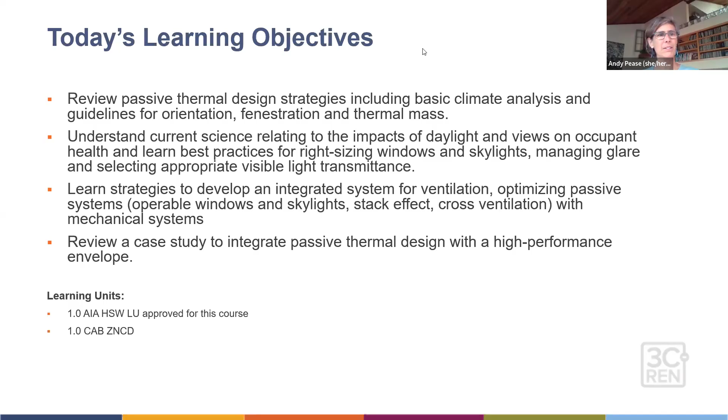All right, our agenda. Looking forward to having this conversation and whatever participation you all are going to provide. So we're going to talk about the historic context of passive solar design and how we got to where we are in terms of thinking about passive solar, going through some of those foundational principles that we've grown up on, been learning in school. And then we'll turn it over to Jennifer to talk about what's changed. Why are we having a different conversation? Why do we need this next generation discussion, and what works now? Then a little touch at the end about what's next in terms of emerging opportunities.

So first, I want to just give that little bit of overview, why this class. It starts more than 20 years ago with a group of folks getting together to make a nonprofit called SLO Green Build. Chime in the chat if you were a part of that or remember that organization. It was a precursor to what has now evolved into the Central Coast Green Building Council. And in those early classes, we were just teaching what is green building.

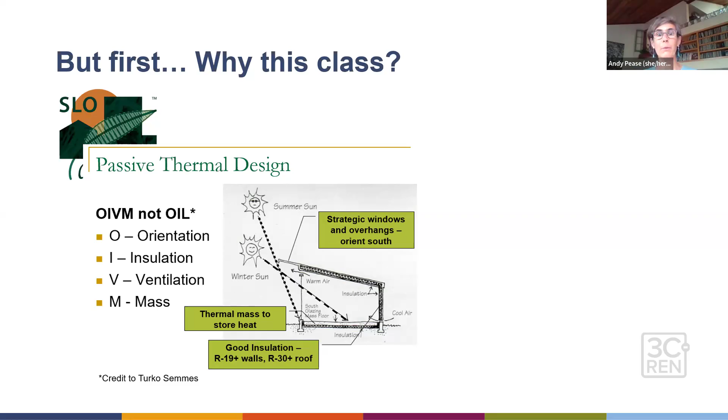And so one of our trademark pieces of information to share was about passive thermal design. Working with Turko Semmes, he had coined this phrase of orientation, insulation, ventilation, and mass. And he would say OIVM, not oil, which was terrific. And then we added a D for daylight at some point, so we had DOIVM. We continued on in this progression. Then there was a period of not a lot of activity specific to these kinds of trainings. And then we were able to pick up with 3C Ren, and a lot of our classes have been about the energy code, about electrification, and about heat pumps.

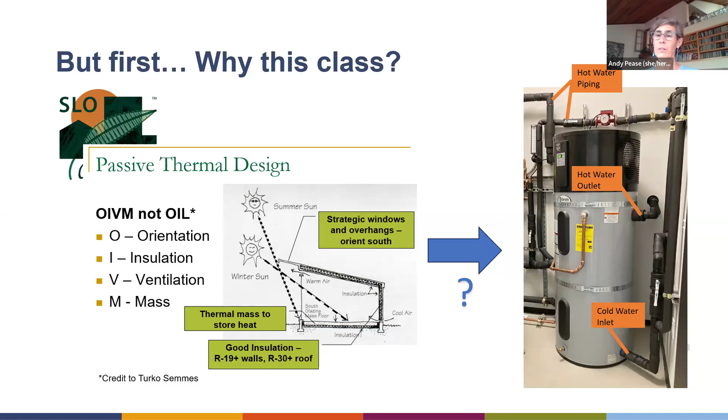And then I got an email from Turko saying, hey, love the classes, but really, what happened to passive thermal design? Like, what are we doing there? So great inspiration. What happened to passive solar? So let's dig in.

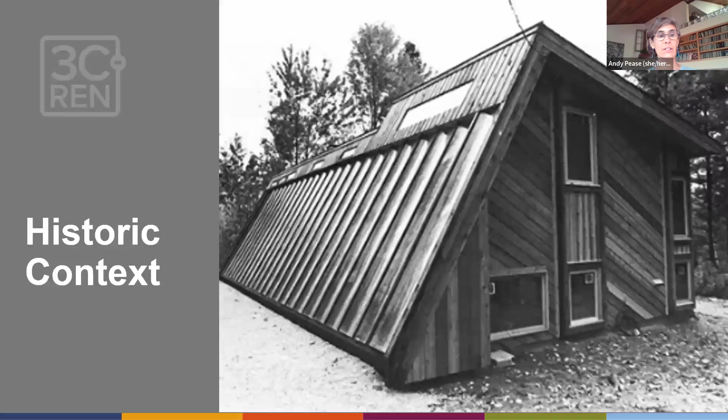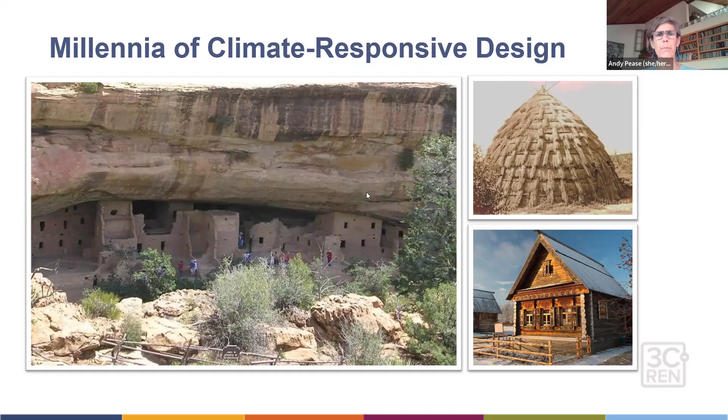There's ventilation. And then up on the right, more local to the Central Coast, using grass and reed kinds of structures. And then way up in Siberia, big trees were available, and you make the tiny little fenestration and these mass timber walls. So we've known how to do that. And then we had this 50, 80 years of maybe collective amnesia.

So 1970s. Oil embargo, and oil and gas got very expensive and very scarce. And so we started to kind of adjust some habits, behaviors, and then there were requirements. Like reducing the speed limit from 70 to 55 miles per hour. Oregon turned off all hot water to state buildings. So we had this kind of a reductive approach to the energy crisis. So it's like, we'll just use less, do less, which has its place and its role, but there were other ways to be thinking about it in addition.

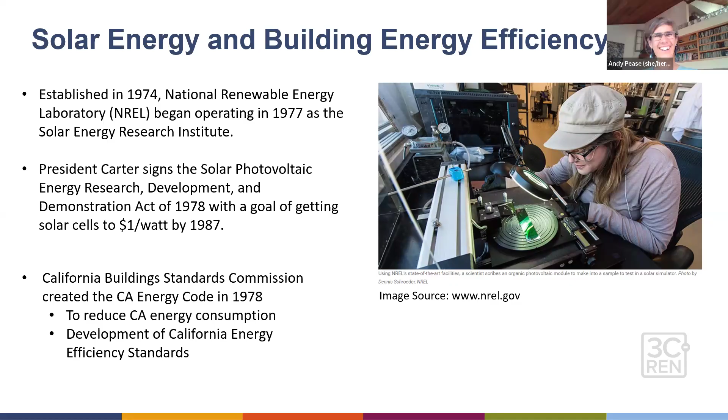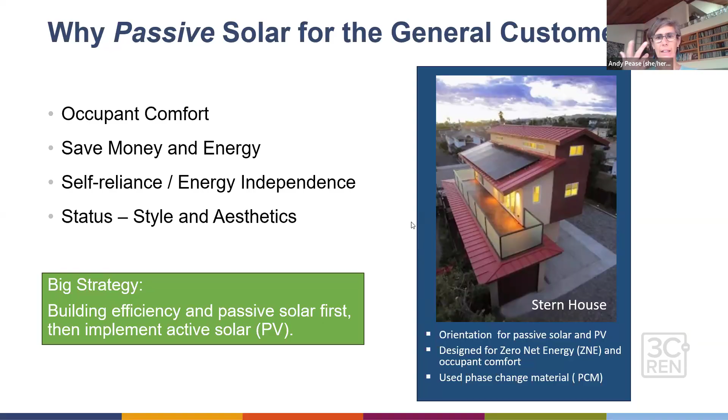I remember thinking, oh, this is important to think about. At the time, an office building had lots of people and lights and equipment and maybe incandescent or even fluorescent lighting. So there was so much heat being made within the building that it was going to need a lot of cooling load, less about the envelope. Whereas in a home, one person is not generating a lot of heat. And so you need to think more about the envelope there, right? So kind of that consideration.

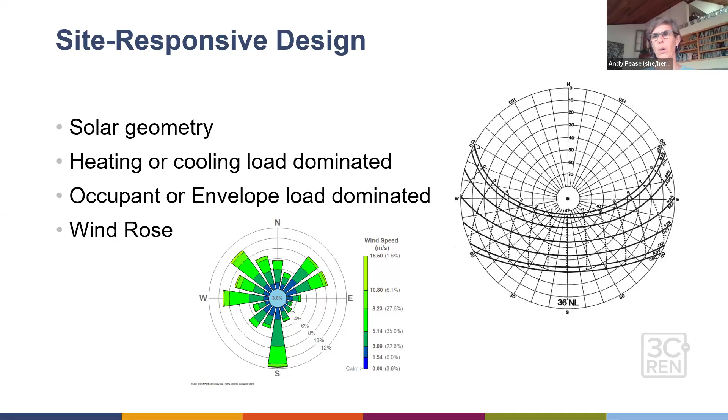Wind roses, a traditional way to show where the wind is coming, not only where and how much, but seasonally how much. So is that westerly wind cooling and helpful in the summer, or is that more of a winter storm wind that we need to think about within our design? And then we would do a lot of analysis at all these sun angles. Again, a sun path diagram, and that informed the overhangs. It informed how much thermal mass and where to put thermal mass.

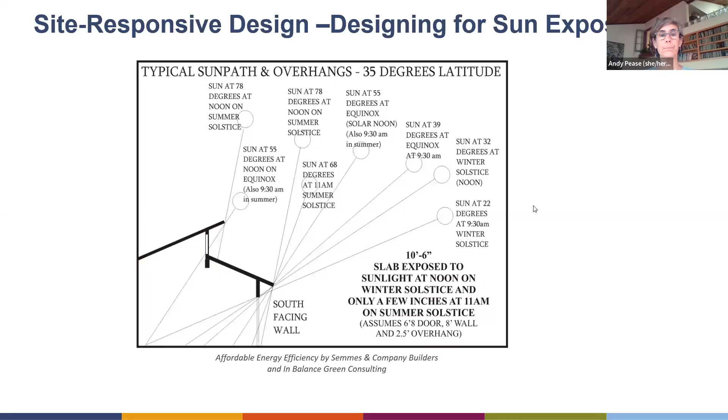And then putting it all in practice. This is San Luis Sustainability Group, Congregation Beth David. It was one of the first LEED certified buildings in our county, and I think the first LEED certified synagogue in the world. And it just epitomizes all those passive solar strategies we were just talking about in terms of overhang, window placement.

Most of the walls are straw bale, so a lot of mass. It's got that thick exterior stucco. But then the south-facing wall with a lot of windows is stick framed. And you can see there's light shelves that bounce in for daylight. Down below the windows, there's actually trombe walls, so tanks of water, and the exterior glass surface is black. And so the tanks of water heat up during the day, and then at night they're little radiators.

Super effective. In fact, sometimes they were too effective. They had to add seasonal shading because those shoulder months were getting potentially a lot of sun. So a terrific model of the passive strategies that we were going with at the time.

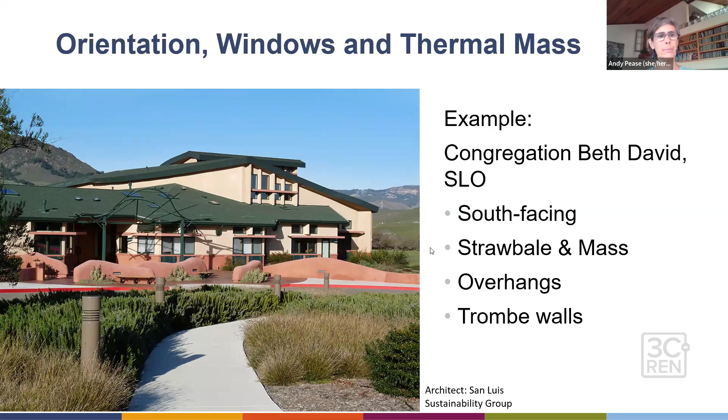Natural ventilation, again, lots of studies and experience that show us how to do this effectively. Low windows, high windows, right? Kind of a stack effect of bringing air up and through. Or another approach in this center one with a cooltower. So in this case, there's warm air up high, and then you can actually add a little bit of moisture inside the tower, and that cools the air, which then drops into the space through these openings down below. So another way to have cool air entering the building in this passive approach.

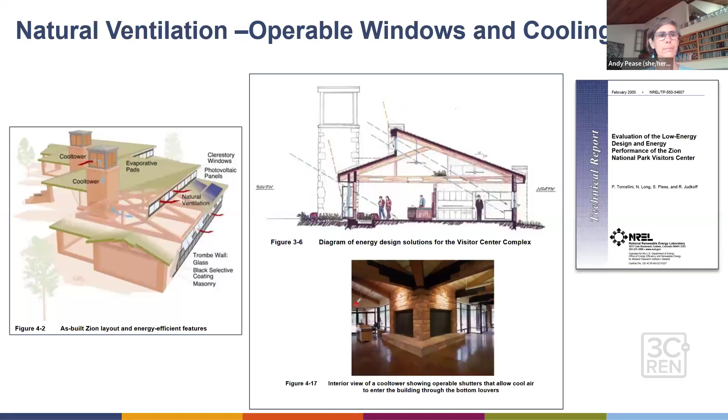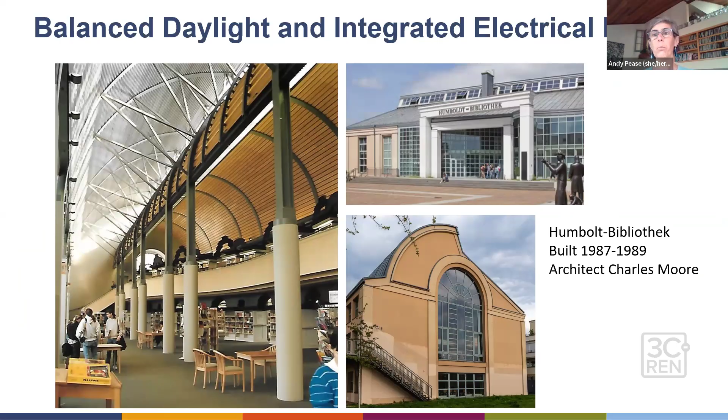And then, of course, finally, in those passive thermal design, passive solar principles is daylight, having good, balanced daylight, but then also starting that conversation about what it looks like when you integrate electric lighting, so that if you have the daylight, are the electric lights going off? Is it complementary in terms of the design and the architecture? And here we have a Charles Moore building. Beautiful.

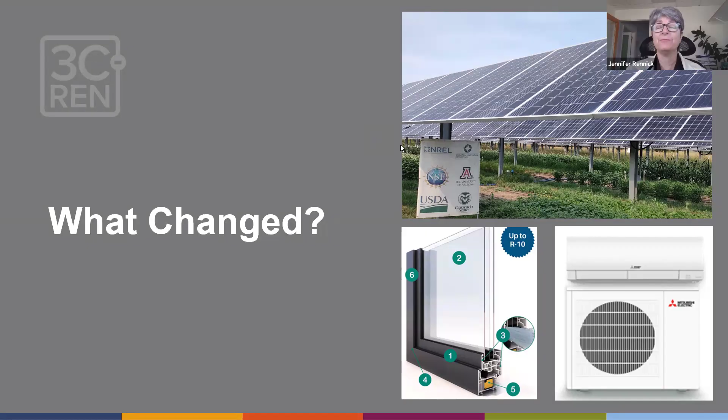Okay, and then I turn it over to Jennifer to talk about what has changed. Basically, what's changed is improved technology and computing power. And so everything that Andy said, all those principles are still true. It's still effective. You could still build that way and you'd still have a good energy reduction.

But now, over the years, we've got better climate data, better software for analyzing buildings, and our California Energy Commission has made Title 24 Part 6 a reality for all of us architects. And so we have to design a building that's basically energy efficient. And really, our current Title 24 baseline has basically caught up to everything that we used to talk about 10, 20 years ago.

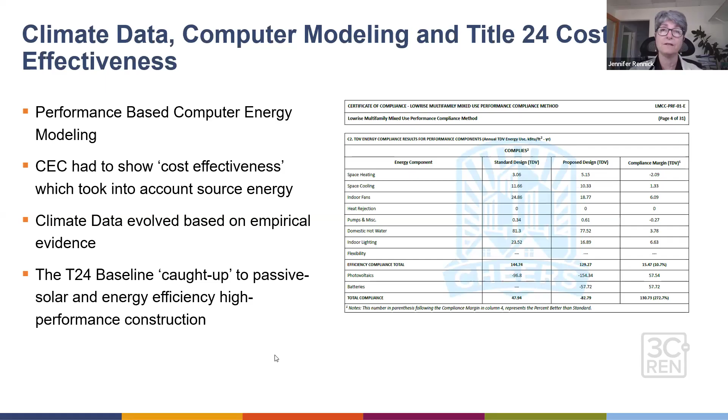And then over the years, Title 24 has caught up. And so all those passive solar principles are still true. It's just that, little by little, the energy code has shaped us and architecture education has moved in this direction. Now, when we go to design a house, and this is a house example, we're just a little bit more energy efficient than what we used to tout as all the passive solar. Great, amazing way to design.

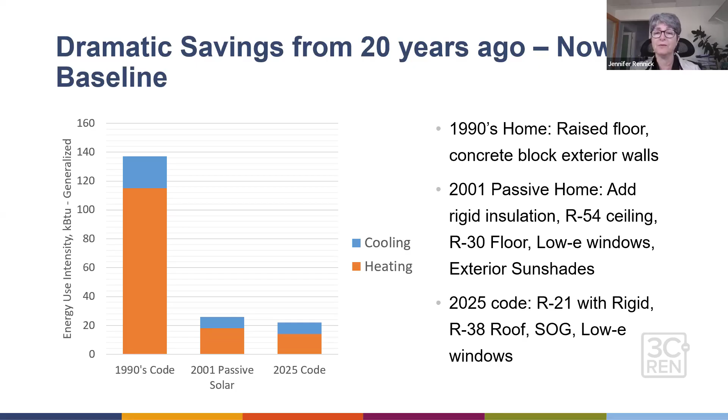So what's changed? Well, some of it is that we have better insulation, and better installation of our insulation is required. So that's baked into the code. And some of the things we do now that we didn't do is really look at air sealing, all of the air gaps, using blown-in products that really fill the whole wall cavity.

So no gaps, no voids. With straw bale, the straw bales themselves were very well insulative. So that's why that had such a powerful impact back then, because you just couldn't get well insulated wood stud walls back then. And now we go around and do things like seal around all the sill plates and cut around electrical outlets, etc. So we have better insulation products.

Yeah, keep going. You were right. Well, I didn't know if you want to touch on the HERS in terms of verification of that. Oh yeah, good point. That's the other thing. True. HERS verification was introduced into the energy code. So we do all these things that you see a picture of, but if your project has a good HERS rater on board, and your insulation contractors are really up on QII, quality insulation installation, then with the combination, you should have a house that looks a lot like these pictures. And that's improved the performance on a lot of homes, just having that in place.

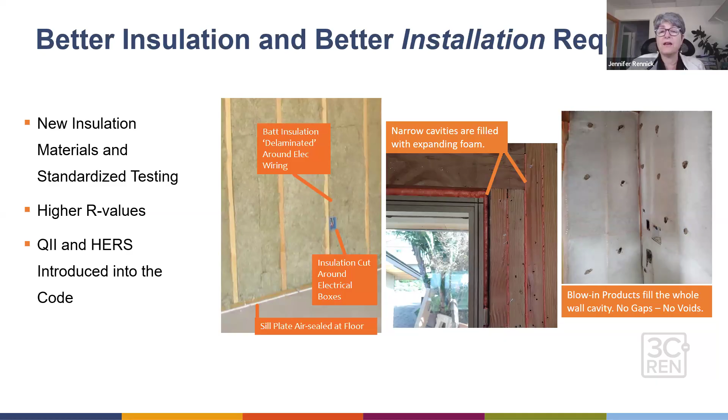When I first started out in architecture, if you had fiberglass batt insulation, you could have huge quantities of tops of the walls and each bay not being insulated, and then someone might complain about it, so they'd try and stuff something in there, and there was really poor quality. Right. And that was still better than what it was, which was no insulation. Right.

I worked on a remodel house. The homeowner was shocked when I asked him, well, what insulation do you have in your walls? And they're like, I don't know. They're 2x4. It's probably an R13, right? I don't know. You better check. And so he digs a little hole, and he ended up ripping the drywall back because he was so frustrated to find out there is no insulation in the house he had just bought. And presumably it was built during the era where the whole house was supposed to be insulated by code.

Okay, so kind of fast forward, parallel tracks. Coming out of Germany, we have passive house. So we hear a lot now in California, passive house. What's the difference? Passive house, passive solar. They both have the word passive in it. Germany is much colder, even colder than our climate zone 16 here in California. So a lot of the work in Germany and in Northern Europe is about really eliminating thermal bridging, minimizing air leaks. Yes, high quality insulation and strategically placed windows. All that's true. But thermal bridging and air leakage are probably two main things that we didn't talk about as heavily in California. But if you were in Colorado, that was something you also wanted to do.

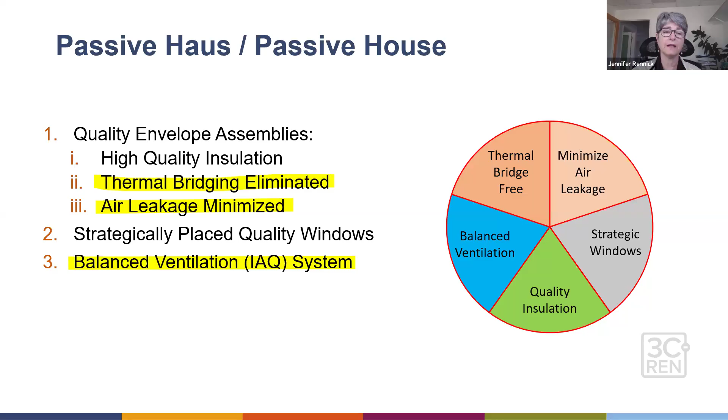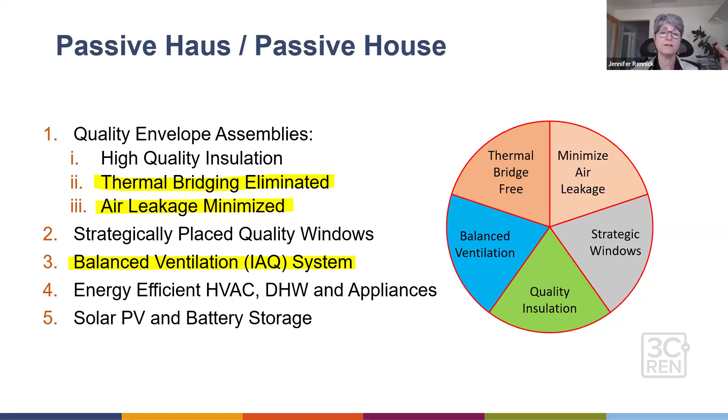And then with the houses being tighter, you need to bring in outside air on purpose, mechanically control that ventilation rather than just letting the envelope leak air. And then we layer on energy efficient heating and cooling systems, energy efficient hot water heating and appliances, plus our solar PV and battery storage. And so now as a whole package, we can design zero net energy buildings. The passive solar part, thermal mass, solar orientation, that still works in California. But now we've got all of these other things that we can work with.

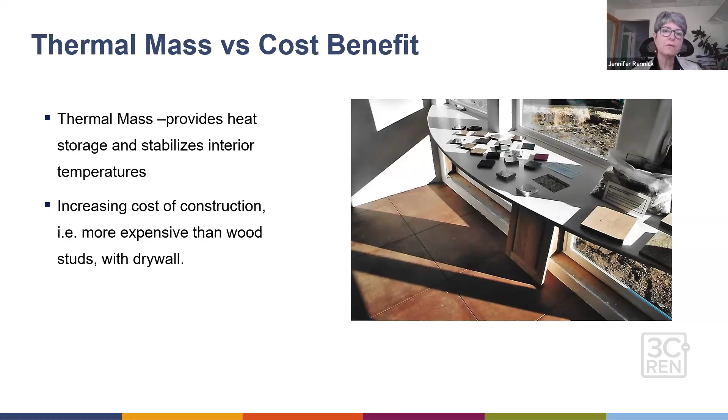So what we found, though, is that what we were doing with passive solar is a lot of thermal mass, and the thermal mass became increasingly expensive, but it provided heat storage from the sunlight coming through our typically clear glass. Sometimes it was still single pane glass. So we had a lot of excessive heat. And so to be able to store that excessive heat in the thermal mass of the building was a way to stabilize interior temperatures. And as our window technology improved and insulation improved, we didn't need quite as much thermal mass. Okay.

What we started to see, I remember in the 1990s, is straw bale and other thick wall assemblies were becoming popular. It was really nice for passive solar because the thick wall of the straw bale could provide lots of insulation. And we were still working with windows that would allow a lot of solar heat gain through the glass. And we would mass up the building, so to speak. So we might have a house that, even if they didn't do straw bale walls, had thick insulated walls, plus CMU or rammed earth inside the house, or concrete or adobe floors, or all of it.

And the conversation started to shift: hey, wait a minute, with these other technologies coming on board, better windows, better ways to insulate our wood stud walls, and not every climate zone is like Southern California, can we overmass our buildings? And is that actually giving us a building that has more carbon impact? We're reducing our operational carbon, yes, but the building itself has so much mass. Are we having too much carbon in the initial construction?

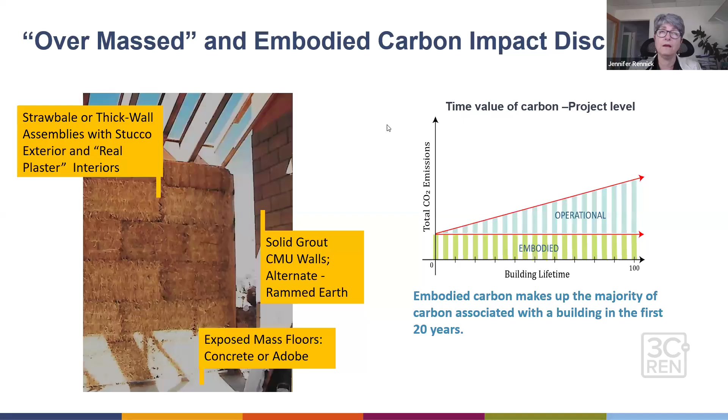So that combined with other improved technologies like greater lighting efficacy. So some of this too was that when we had incandescent, even compact fluorescent lights, like Andy talked about with the daylighting, there was a lot of heat given off by those lights, more than the heat from the daylight itself. Now with LED lighting, the solar heat gain gives off more heat than the LED lights. So we saw kind of a trend to not having so much glass.

And then we have high performance windows now with the selective low-E coating. So we can have glazing that lets very little solar heat in, or we can fine tune it and allow relatively a lot of solar heat to come through. Air sealing, better insulation, better HVAC, better way of heating, and that continued conversation of thermal mass benefit versus the embodied carbon impacts. Now, with our higher efficiency heating and cooling systems, we now have heat pumps.

And the heat pumps, yes, they use electricity to create the heating and cooling, but 1 unit of electricity into these systems, you could get 3, 4, sometimes higher, more energy output. So they're definitely more efficient than burning fossil fuel right at the building. And so part of the way we used to do it is use a lot of appliances that use fossil fuel directly. And we'll hit on that again in a moment.

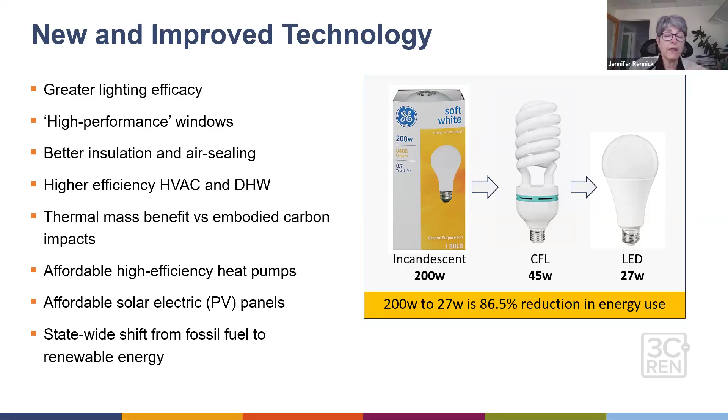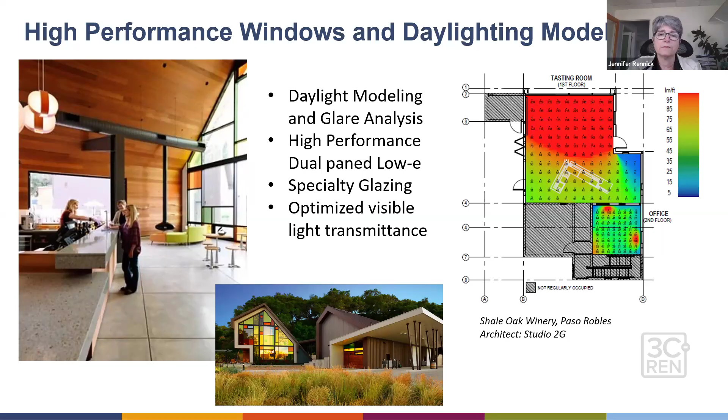And then with our daylighting, we can look at the glazing and fine tune it. So this project, for example, Studio 2G, we worked with Newcastle Glass to really get them the aesthetic colored glass look, plus fine tune the visible light transmittance and the quantity of solar heat gain through the window. That wasn't so popular or possible, you know, 20 years ago.

So in California, to kind of put this in perspective, in the 90s, when we were still doing a lot of work with passive solar, our electric grid was not very clean. California was still burning coal back then to generate electricity. We were burning natural gas to generate electricity. So the electric grid itself was quote unquote dirty, as opposed to now becoming more clean with renewables.

So we didn't push electric appliances very much because it was cleaner to have a higher efficiency gas burning appliance and burn gas right on site than to burn gas or coal offsite to generate the electricity, get the transmission line loss, send it to your appliance, and then have an appliance that only had a 1-to-1, 1 unit of energy in, 1 unit of heat out. Extremely inefficient system.

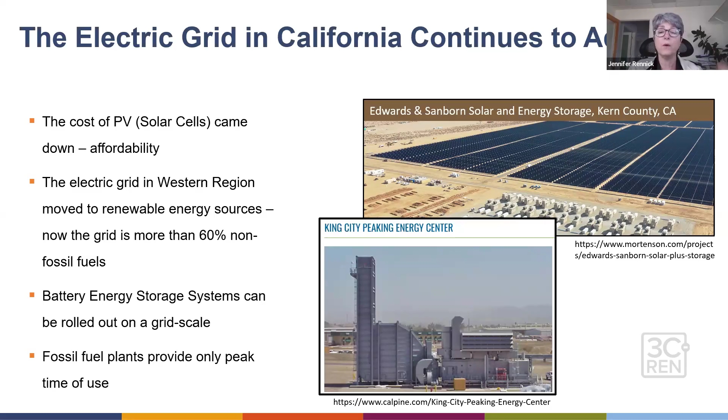Now we have a grid that's more than 60% renewables, so it's non-fossil fuel. We have battery storage systems, and we're at a point now where our fossil fuel plants can provide only peak time of use when we get enough solar and wind on the grid. So along with that, case in point, now we have these better heat pump technologies for space heating, space cooling, heating your hot water, and we have induction cooking.

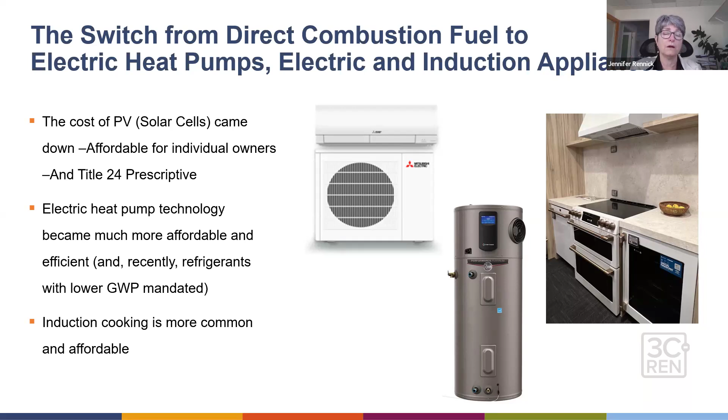So we've really switched away from burning fossil fuels in the building and now into using electric resources that are coming maybe from on-site solar right at the house, and having it be many times more efficient and reducing the load on the building in terms of internal unwanted heat gains. So the buildings themselves are shifting more and more to what we call envelope load.

So what now? Oh, and then I have this book here, which is so fun for me because this is one of the solar pioneers, and the message at the last ASES conference I went to is solar still works, but everyone also was talking about passive house. It's like, okay, in California, all our passive solar mass strategies work.

So orientation, use your mass strategically, but a lot of those benefits in the mass are baked right into your Title 24. So it's not like you should ignore it, but now you're going to layer on these other technologies to it, and you can reduce your footprint down even further and have a zero net energy home.

And before I flip the slide, I'm going to just take this opportunity to brag about Jennifer, because this is the conference where she was inducted as a fellow into the American Solar Energy Society. So thanks.

Thanks for mentioning that. Okay.

Climate analysis is still important, but a lot of architects, I noticed, don't always dig into the climate data for the location, partly because it's baked into our compliance software now. So if you're doing a performance model for your project, presumably the person operating that software has a good understanding of the climate zone, or at least they'll be able to get you to pass your Title 24, which in and of itself is pretty good.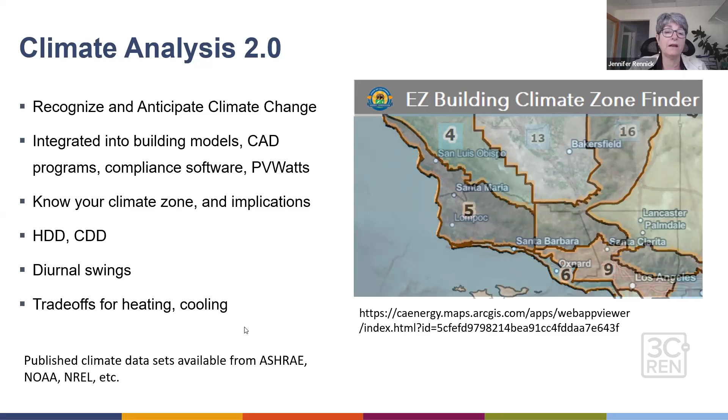A lot of times now, we do slab on grade construction, but we insulate the slab on grade away from the rest of the environment, and we have drywall inside our building already. Turns out that's probably enough thermal mass for most of our climate zones. You can add a little more, it doesn't hurt, and it really comes down to how much money the client wants to spend. But when I say slab on grade, we're usually talking about an exposed slab, not carpeting it over. So sometimes that comes down to an aesthetic choice as well.

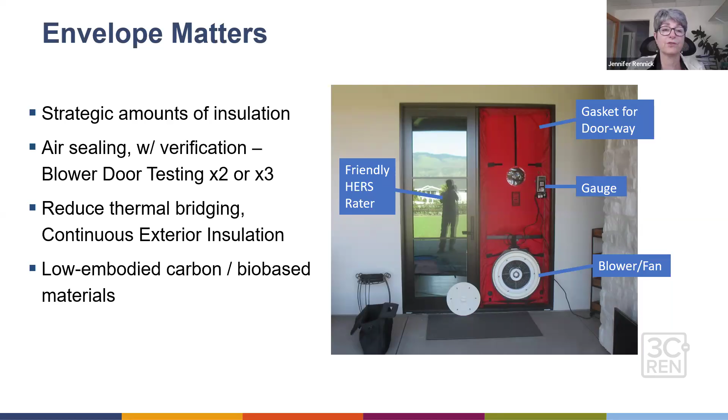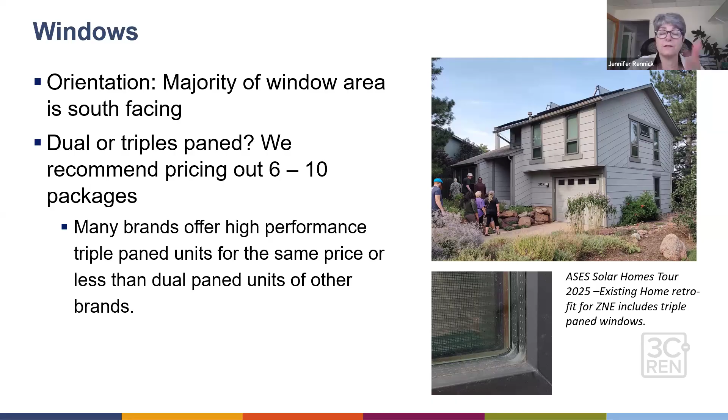Windows are important. The majority of the window area should be south facing. I'm going to go through a bit of an analysis of what proportions are recommended for our climate zones. Dual or triple paned windows are available within a good price range, and they perform very well. This is an example; they look like regular windows, but these are triple paned, part of an existing home retrofit for zero net energy that was on the tour when I was out in Colorado. So

This is just one brand, Alpen, that's available in our area, and they offer a variety of U-factors and solar heat gain coefficients. Some of our climate zones work better with some solar heat gain coefficients than others. Take note that we've got a 0.25 solar heat gain coefficient, a 0.35, and even a 0.57. So depending on your climate zone, you can really fine tune how much sun you want in.

So for climate zone 5 here in the San Luis Obispo and Santa Maria area, it's actually very beneficial to use a window with a 0.35 solar heat gain coefficient. But in climate zones 4 and 6 through 9, you're looking at targeting a 0.23, maybe even a little less, for your solar heat gain coefficient. And that'll make a difference in the performance of your passive solar strategy.

And then Jennifer, the U-factor, that's notably really low, really good insulating, right? What's the max U-factor you're generally allowed? Well, coming up with the 2025 code in January, the U-factor will drop down to 0.27. And with triple pane, you can get it down to like these windows, 0.12, 0.13. So again, making a well-insulated envelope, but fine-tuning the solar heat gain coefficient so we can accept solar heat in the winter when we want to, and shade it in the shoulder and summer seasons.

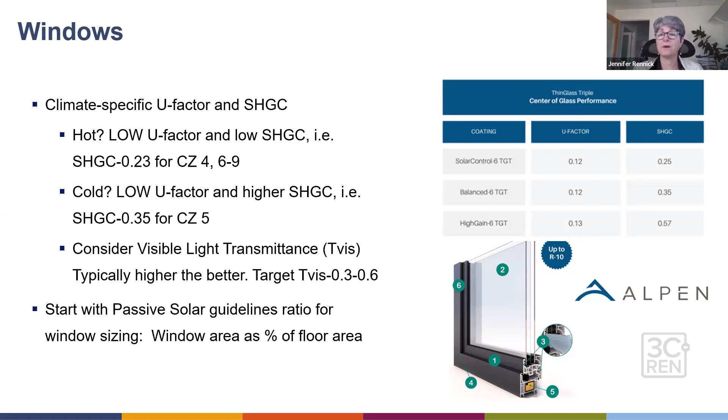So for the passive solar guidelines for our area, climate zones 4 and 5, San Luis Obispo County and the northern part of Santa Barbara County, for the south we're going to target between 20 and 24% of our conditioned floor area. Take that number, multiply it by 20 to 24%, and that's how much south-facing glass area you can have.

But we want to keep the total down to 25 to 35%. Climate zone 6, down in Santa Barbara, the south-facing glass target is a little smaller, like 15 to 22%, and even the total window glazing, 24 to 30%. That's because it's a warmer climate, you can overheat more. And those windows can benefit from the lower solar heat gain coefficient.

And then the next climate zone, like 9, it's even warmer, and that's in Ventura County, further up and closer to LA. In that climate zone, you don't want so much south glass, 10 to 15%, and maybe your total glazing is 16 to 24%. Now, Title 24 kind of puts these prescriptive maximums on everything around 20%.

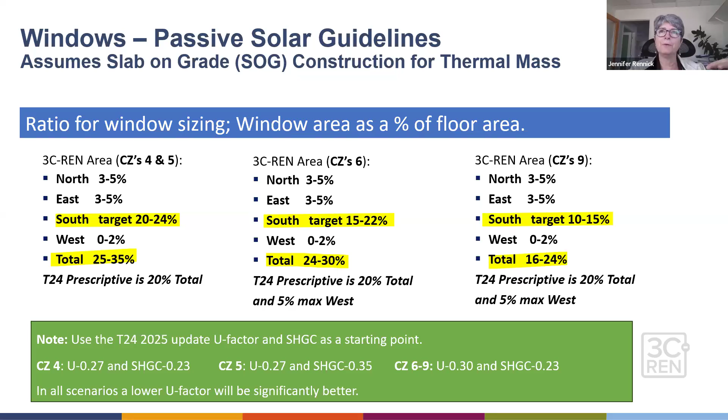But with a passive solar strategy using the performance method in certain climate zones, you can actually get away with more glass, like climate zones 4 and 5, which I think makes sense because that fits with our climate zone in and around Cal Poly. The people who were doing passive solar in this area, it was a good fit, right? It was a good match.

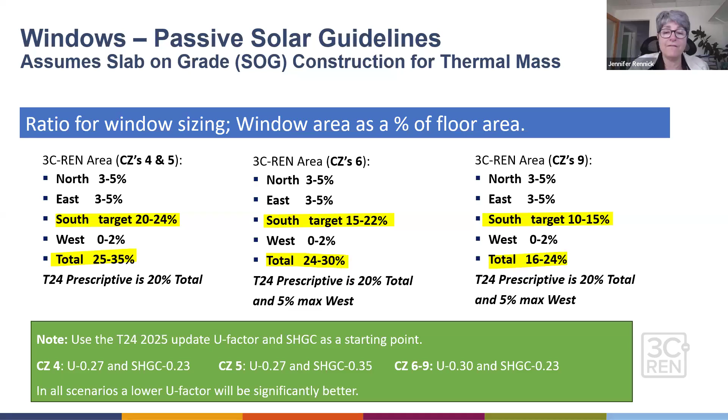You're going to get a copy of the slides, by the way. And so I put some climate zone information for you that's going to be part of the 2025 update, with U-factor and solar heat gain coefficients.

Taking a look at a house, I ran it through some computer modeling, looking at climate zone 4, and I did this for a few of them just to give you the background on how we were looking at what makes sense for passive solar. We've assumed a 2,100 square foot slab on grade. So that slab's our thermal mass, the drywall, that's kind of baked in. R21 walls with an R5 continuous envelope, and in this case, a solar heat gain coefficient of 0.23.

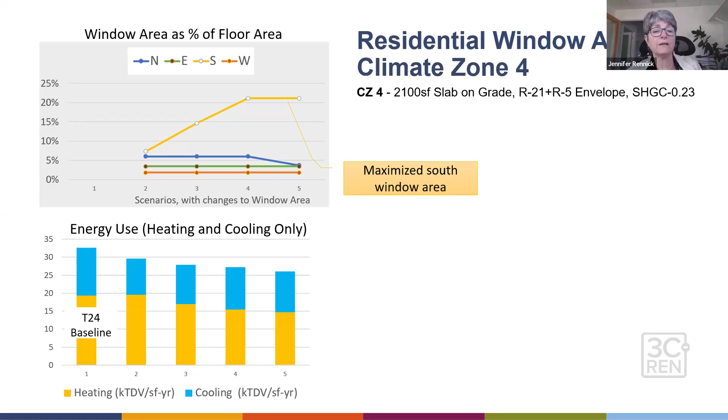So then I started to look at what can we do? Yeah, go ahead, click it, Andy. Maximize our south window area. So making changes to the baseline window and then increasing the south glass until we had a point where it either flatlines or starts to give us diminishing returns on our energy use.

And so the main takeaway for climate zone 4, like in and around Atascadero, is that the passive solar principles, the orientation, glazing proportion, thermal mass, they're all good strategies. They work. And then you basically reach a point where it just slowly keeps ticking down, more solar, more mass, but you don't have the cost benefit anymore.

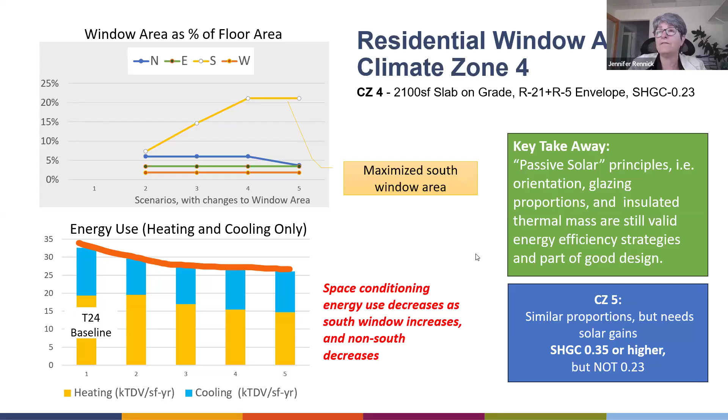And then climate zone 5, in and around San Luis Obispo, it's really similar, but the solar heat gain coefficient windows need to be a 0.35. If you put the wrong windows in, you actually increase your energy use for climate zone 5.

And climate zone 6, a similar study, but overall we might not see as dramatic energy reductions. Climate zone 6 is such a mild climate, we already start with relatively lower energy use per square foot. So the window area, 15 to 20%, basically has the same energy use. It just shifts from heating dominant to cooling dominant, depending on how much south glass you have.

So if you've got better views and you don't mind using the air conditioning on the heat pump more, you can add more glass. Or if you'd rather situate the house so that you're getting more heat in the winter and not so much overheating in the summer, use a little bit less south glass. But the main takeaway is climate zone 6 is relatively mild. You want to use the 0.23 solar heat gain coefficient windows, and those passive solar strategies all still work.

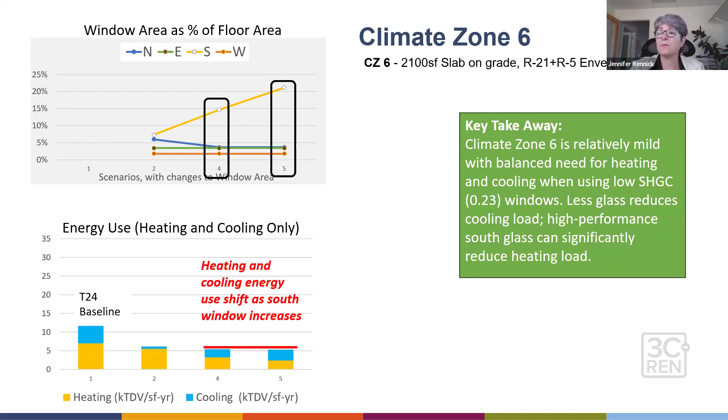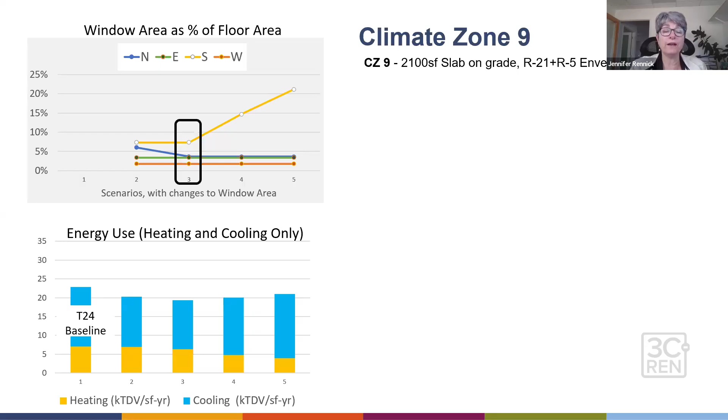And then climate zone 9, it's got a baseline Title 24 budget that's much more generous than climate zone 6. It's definitely hotter, and because of that, there's a lot of times where you can overheat. Pardon me. So really, having our south-facing glass even below 10% uses less energy than when we increase that glass up to 15 and 20%.

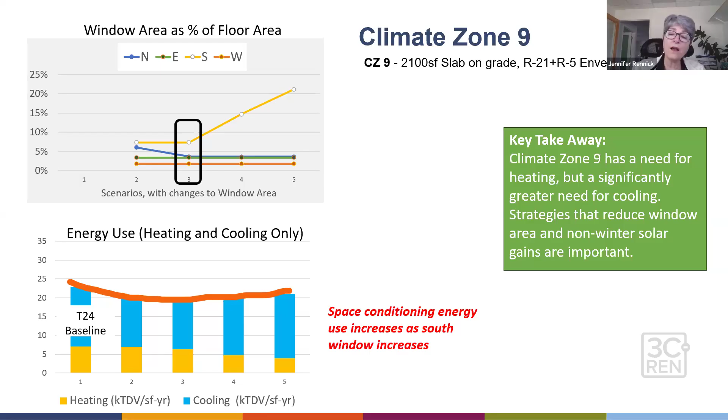So it has a need for heating, but it has a significantly greater need for cooling. So strategies that reduce the window area and the non-winter gains are important.

So speaking of that, especially climate zone 9 and even Atascadero up here in North County where I live, it gets hot. So it's really important to think back on our passive solar strategies of how to design overhangs and operable shading to protect the windows from unwanted sun. And operable shading is still an excellent strategy for our shoulder season.

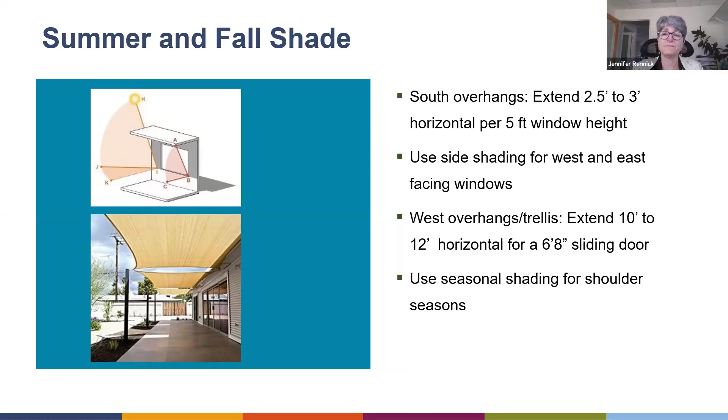And what we mean by shoulder season is in the spring, it's still relatively cold. Same sun angles as the fall when it's hot, but in the spring, we want the sun. In the fall, we don't want the sun. So being able to drop shades or extend shades for the shoulder season in the fall is really important, especially on the west. Okay, one second.

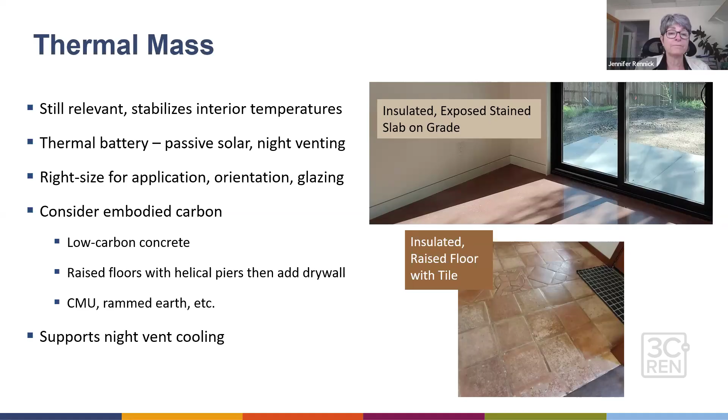Thermal mass turns out still relevant. So a lot of the projects we work on that are low energy use have insulated, exposed, stained concrete as the floor. If it's a raised floor, you can use tile and insulate the floor. For a lot of our clients, we do have them consider the embodied carbon. So we're not trying to overmass the buildings, because it turns out concrete has a lot of impacts on embodied carbon. But the idea of using thermal mass as a thermal battery for passive solar and also night vent cooling is still valid.

This is a house example in San Luis Obispo. So the orientation with the majority of the glass is within 15 degrees of south. This house uses triple paned windows, and the overhangs were calculated to shade the bulk of the window wall that can open in the summer, but let all that sun in the winter. And these floors are also exposed concrete, stained concrete, and polished with insulative material underneath the concrete slab.

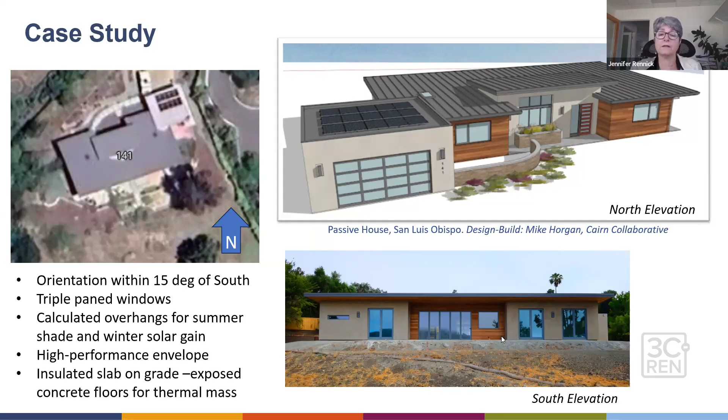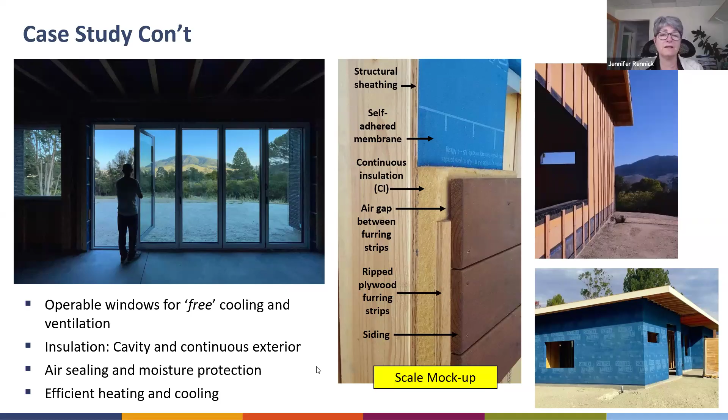And all the operable windows, basically I like to call it free air conditioning is how I phrase it. Because one thing nice about the heat pumps is they heat and cool, but you could set your thermostat, let's say in the summertime, for cooling mode only and set the thermostat such that it's not going to kick on. You open up the windows, that nighttime temperature is lower than the set point on your thermostat. So that's just free air conditioning, and your heat pump doesn't kick on until needed, and then you can close up the house. So those passive strategies still work really well with homes that are built to the passive house kind of standard in terms of air leakage, rain screens, exterior continuous insulation, et cetera.

Okay, and then speaking about windows, ventilation, Andy's going to take it from here.

All right. So with the ventilation, I think there's that temptation of just turning on the AC and closing everything up. But of course, in our passive strategies, operable windows are still super important, and thinking about the effective open area. So single hung or double hung for the same square footage of glass, you're getting a lot less effective opening compared to a casement window. And tilt turn options kind of give the best of both worlds, being able to give a little bit of top venting or be able to open it wide. So getting the strategic use of whatever glass you have.

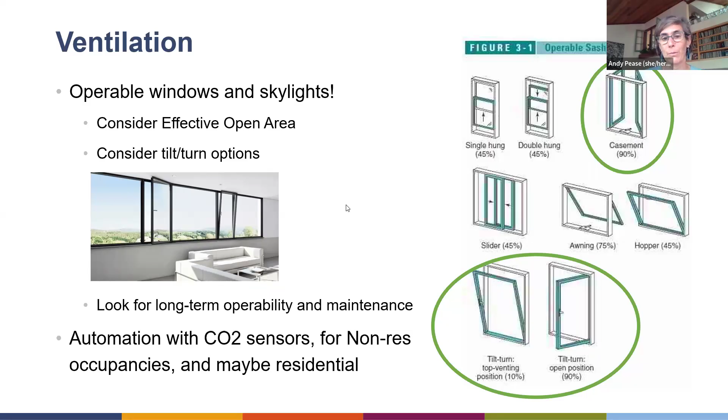And then a consideration for the operability and maintenance and having those quality windows, and whether or not you want to have sensors in there. CO2 sensors for non-res makes sense, but maybe even residential occupancies, depending on where you go.

This is a project called Living Places Copenhagen. Velux was a major researcher and supporter of this project. A couple of us had a chance to go and live in it for a week and understand how it operates. And during that time, throughout that summer, they did monitoring. So the house, you can see, has a funny shape, and that's because of these passive strategies, that they have skylights and then roof windows. And so it's made to take advantage of both cross ventilation and stack effect.

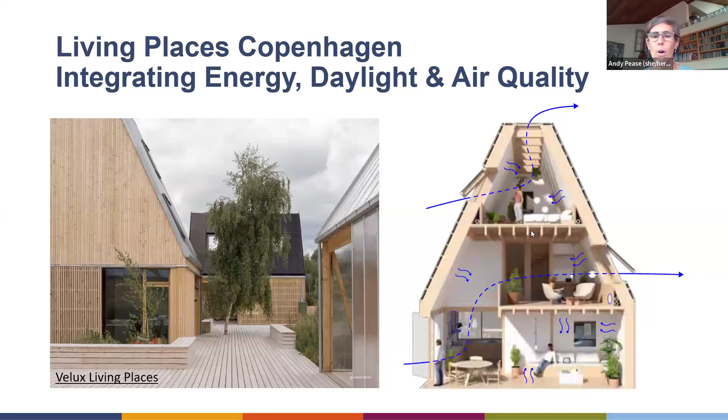So you can see that the first floor is connected to the second floor, and it's a little harder to see, but then there's actually an opening where the second floor can connect to the circulation up to the third floor. And so all of these have sensors. So everything is operable. There's an automatic control with an override. And then they close automatically if there's rain. And then they track the data. And what they found, I was impressed with. So for these months of July and August in Denmark, there was no heating and no air conditioning for those 2 months at all. The thermal comfort standards were met 90% of the time.

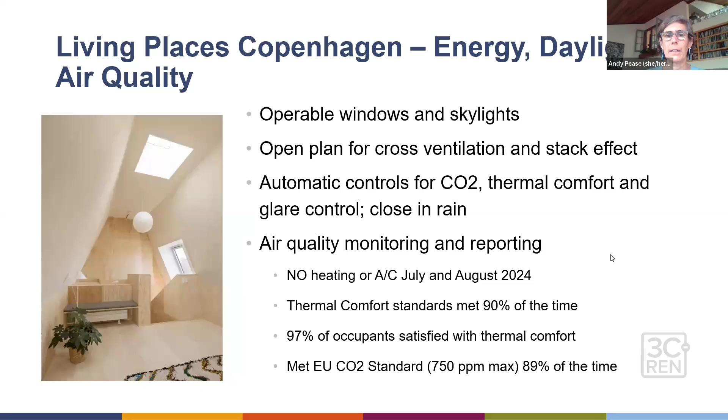97% of the occupants were satisfied with the thermal comfort. So again, no heating, no cooling, just the controllability of these skylights and a really great envelope. And it met the European Union standard for CO2 89% of the time. So no mechanical ventilation in this one as well. Obviously, kind of a 2 months of summer, a little bit of a snapshot, but a good case study there.

So for cross ventilation, of course, it's going to depend on wind speed, distribution of your openings, but you can think about having about 5% of the floor area should be net-free openings. So if you have a 10 by 12 room, a casement that's 2 by 3, 2 by 4, something like that could provide that.

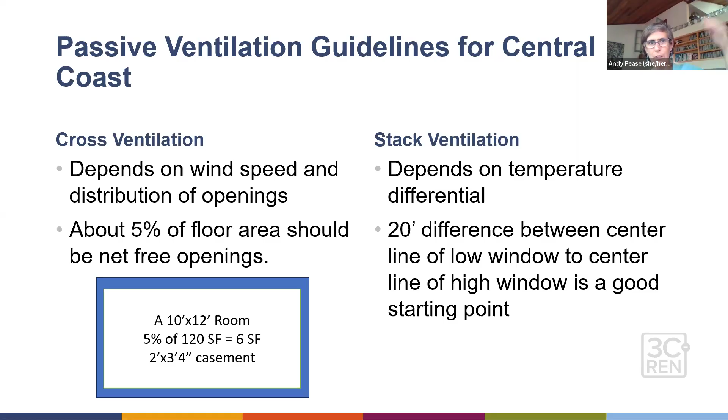Stack ventilation, again, depends on temperature differential. We've seen strategies that, in fact, try to elevate the temperature of the air up high in order to drive a stack effect. But in general, a good starting point is having a 20-foot difference between the center line of the low window to the high window. So that's kind of why you need those 2-story volumes to really get that rolling.

And then the natural ventilation that you supplement with fans and ducted systems, right? So when the temperature is great outside, open everything up. But if you are heating or cooling the building, you're going to want fans. That's also, as Jennifer talked about in terms of passive house strategies, to have heat recovery ventilation.

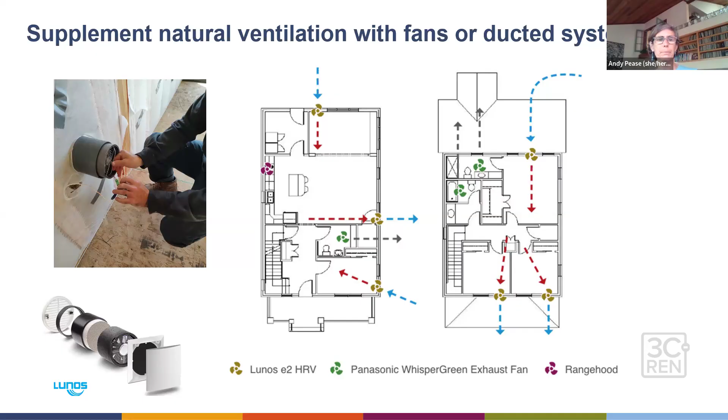Daylight, we've touched on a couple of times, and as a passive strategy, it may or may not help with energy loads, right? LEDs are so good that you can get your lighting from LEDs, but you can and should do daylight anyway for comfort, views, well-being. Also, the studies show retail sales are higher in daylit spaces, student learning is improved, and people heal better in daylit spaces. So do continue all those great daylight strategies.

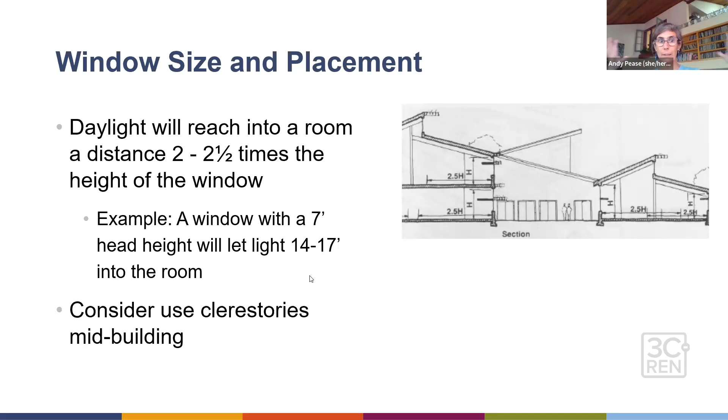And within that, window size and placement in terms of daylight reaching into a room a distance 2 to 2.5 times the height of the window. So if you have a 7-foot head height, then you can get 14 to 17 feet into the room, depending on the light shelves and the colors of the ceilings, etc. And for a deeper floor plate, you would consider using clerestories, maybe mid-building.

This is Mind Body here in San Luis Obispo. It had a big high ceiling, and they had windows on both sides, and windows up high, but because they were so far apart, you weren't going to get the balanced daylight. So they ended up splitting the floor plate to be able to get a high clerestory window in that central portion. And then it made a nice drop ceiling for one part of the building. So no top lighting needed here, and that also helps with keeping space available for solar panels.

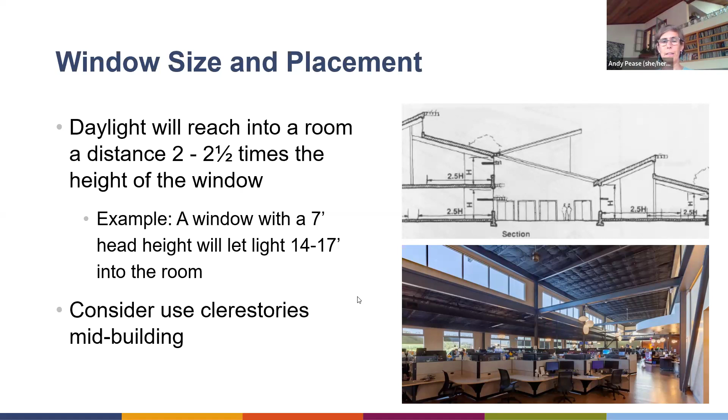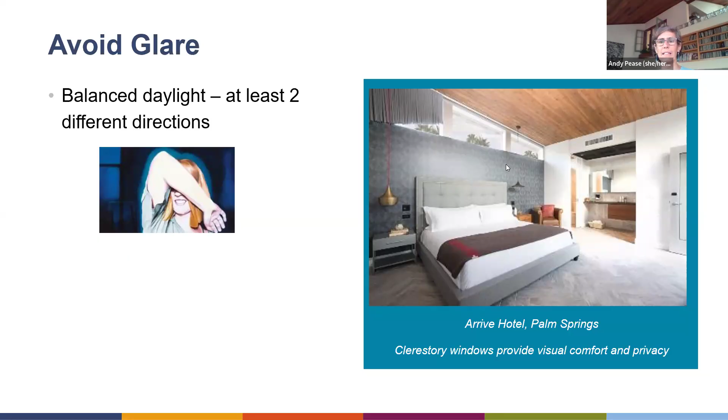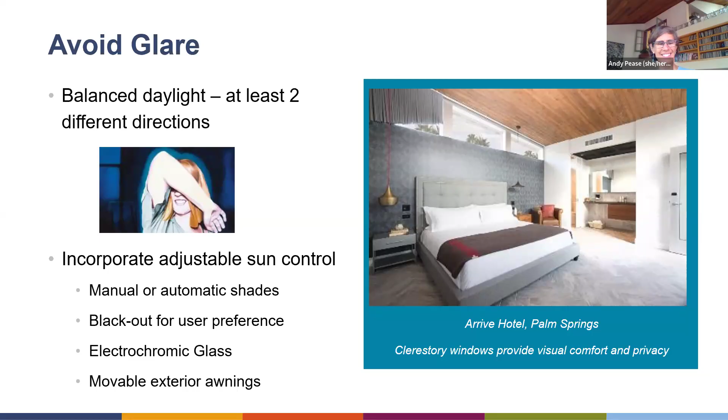So visually comfortable. And just as Jennifer talked about the importance of shading for heat gains and thermal controls, you're going to want those same types of shading for your sun. Sometimes users like blackout, so understand your user preferences. Of course, there's electrochromic glass that I see more in magazines than actually in practice, movable awnings, all those kinds of things.

And what we're finding recently is that sometimes we've seen some unfortunate trade-offs of selecting glass properties without understanding the balance between solar heat gain coefficient and visible light transmittance. If you end up with a super low solar heat gain coefficient, then you might also end up inadvertently with a really low visible light transmittance. So the lower, the darker it is to be able to see out.

So be thoughtful about that comparison. The other conversation that we have a lot about is skylights versus sun tubes. So sun tubes are almost thermally invisible because they have that Fresnel lens and the metal mirrored tube, and it brings in light, but it doesn't connect to nature. It doesn't have that drama.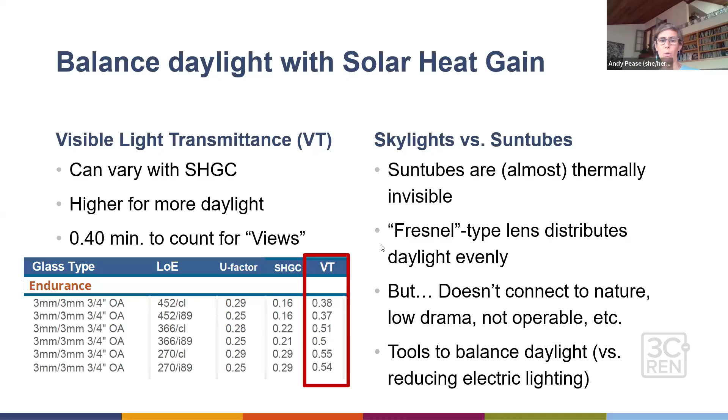It's not operable. So we used to use it a lot more in order to balance daylight because daylight was less energy impactful than electric lighting. But now, since it's shifted, we end up like, is it better to just have an LED, or do we want the sun tube? So I think both skylights and sun tubes have their role in design, but just being strategic about when to use which.

Also, in terms of making the best use of the windows where you have them, pulling back individual offices from window walls is a great design strategy, rather than trying to borrow light from an office into interior spaces. So here's a project where the circulation is along the window wall. You can kind of see up high windows that are bringing light further back. Here's a medical office, where again, they were going to put some of the office space against the window wall, but they pulled the reception to the interior so that the entire waiting area could have the shade.

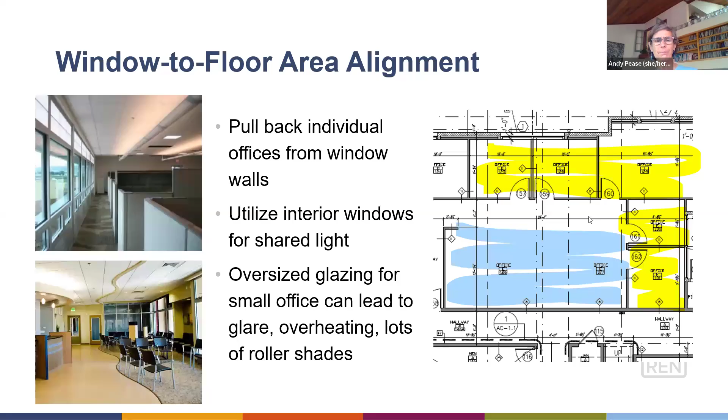So this is an office building on the right with a big floor plate, and so unfortunately the exterior individual offices get a lot of daylight. In fact, sometimes they will get overheated because proportionally from the outside, you design these big window walls to put daylight into the office. But then by the time you break it up inside, you end up with these offices that have too much window and the interior spaces that don't get quite enough. You can try to glaze the office walls. In this case, it turned out expensive. So it was a bit of a lost opportunity there.

And then in terms of that top lighting, here's a study where the bluish color means more light, darker red color is less light. And so they're showing a retrofit. So there's just the exterior window walls, and this first one is the daylight study with no skylights. Then they asked, how would it be if we did central skylights? So you end up with four clustered skylights, a lot of daylight, which has some drama.

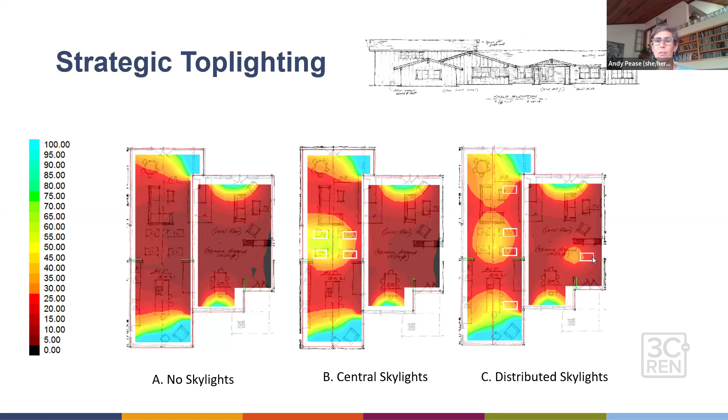Another option that we presented was distributed skylights. Not that one is better than the other, but just as an opportunity to show you can have more even light throughout the space, and we even brought in one additional skylight in a space that's particularly dark and might otherwise have that potential for glare if we don't have the balance with the exterior light.

And then as you go through these passive strategies, have the complementary mechanical systems, like designing for off. How many times have you gone into a space that has fabulous daylighting and the electric lights are still on? So being able to have those go off automatically, not come on unless they are switched on, or some kind of thoughtful control that way.

And then whole house ventilation. It is so important for us to have whole house ventilation, and it's required by code. But by code, you are also required to have an off switch. That's because if the outdoor air quality is lousy, they want to make sure it's accessible to a user to be able to turn off the ventilation. Well, you can still turn off that ventilation if you don't need it because the weather is amazing and you have your windows open. So having complementary systems, and then being thoughtful about air conditioning. Sure, you might have a lot of great windows, but if it's super noisy, what is the user expectation on those?

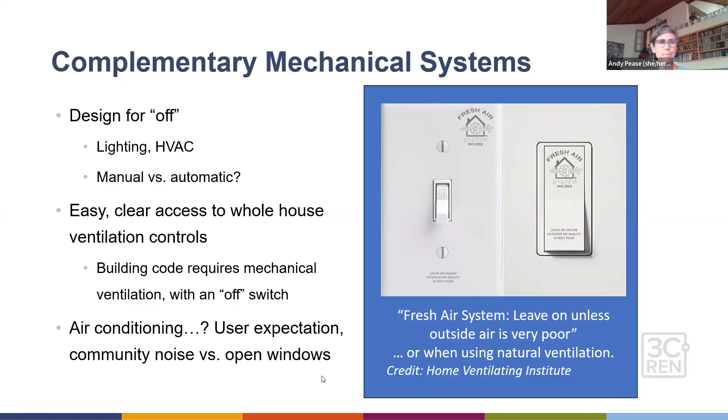So in summary, passive solar design is alive and well. There are emerging concerns, right? We've started to see some conversation that we want to follow up on about fire risks, smoke, indoor air quality, potential climate change impacts, floods, droughts, power outages, whether intentional or emergent, and then load shifting, the strain on the grid.

So all of these reasons. So emerging opportunities, as we've talked about: the technology, the advances in energy storage, microgrids, being able to have that bit of resilience, detailing, material availability, global awareness and leadership in this world, regenerative design approach.

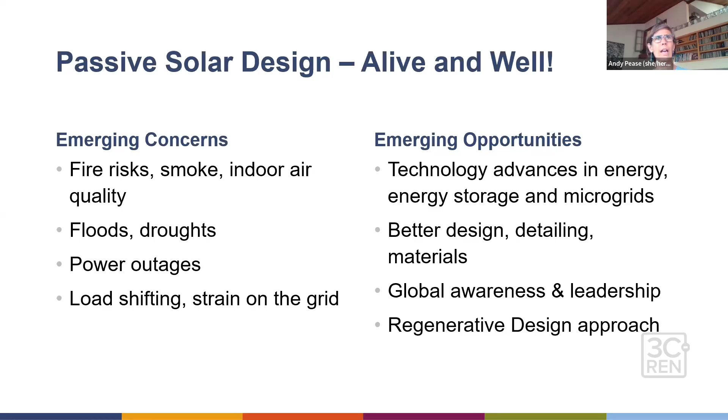And I think that without thinking about these strategies, there's a potential for our own hubris, right? So as much as I was judgy about, oh, we've got all this oil and energy, I think there's a potential for us to do that again in terms of, wow, we've got all this renewable energy, so it's no impact. And it's, of course, always going to have impact. So we want to continue on a progression that I think a lot of folks have been along for a long time. And so, again, having a collective awareness.

Code compliance is really about doing things that are less bad. Sustainable, LEED certification, those types of things, are trying to be neutral, just trying to have no new impact. Whereas this next step of regenerative design is about healing. So can we have our projects actually help heal the injury that the planet has and continues to experience?

So here's a forest building in Milan. A friend of mine saw this when she was vacationing and took a picture to send to me, like, oh, Andy will want to see this, right? So every balcony has all these trees all over it. An urban site that had been highly developed. And so as they were wanting to provide housing, how do we restore this site and the forest that was lost?

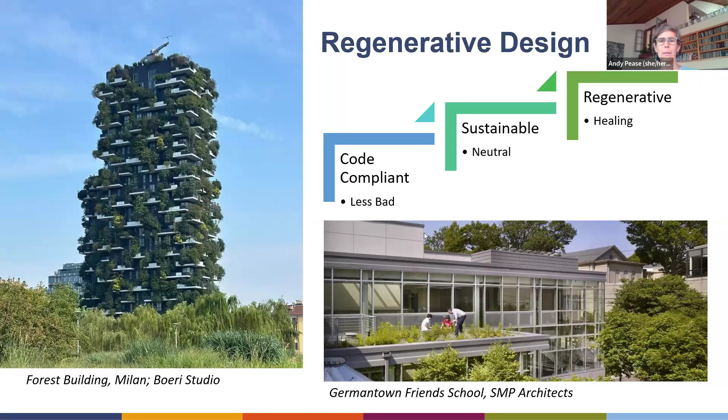And then another project with vegetated roofs. How are we utilizing all of our space to be able to be good for the earth?

Biophilic design is a concept that builds on humans' innate attachment and care for nature. And so this kind of design connects occupants with nature. Could be daylight and views, natural materials, even how we arrange spaces to mimic how evolutionarily we like to have places of refuge, places of view.

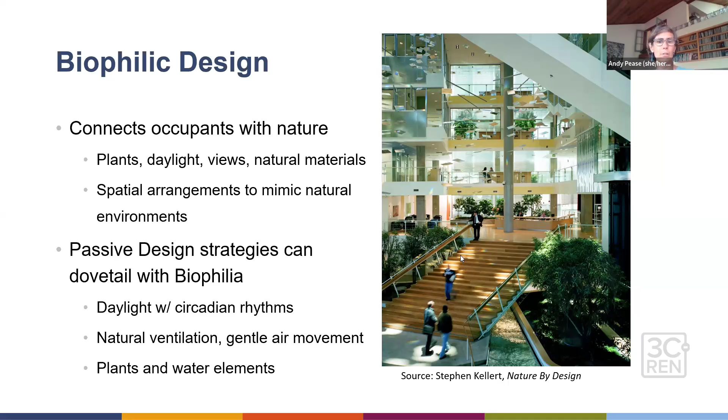And it dovetails with passive design, right? Because daylight, circadian rhythms, natural ventilation, we want to feel that air movement, plants and water elements. So in addition to reducing energy, there's also this lovely nexus with occupant well-being and a healing of humans as well as ecology.

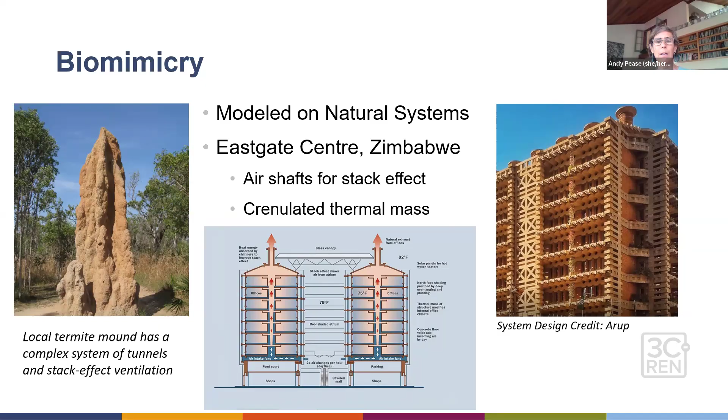So there is a mechanical, low-level fan, but it's about 70% less energy for conditioned air, as it were, than a regular one. And then it ends up with this delightful interior atrium as well, as just a fun space and much more comfortable.

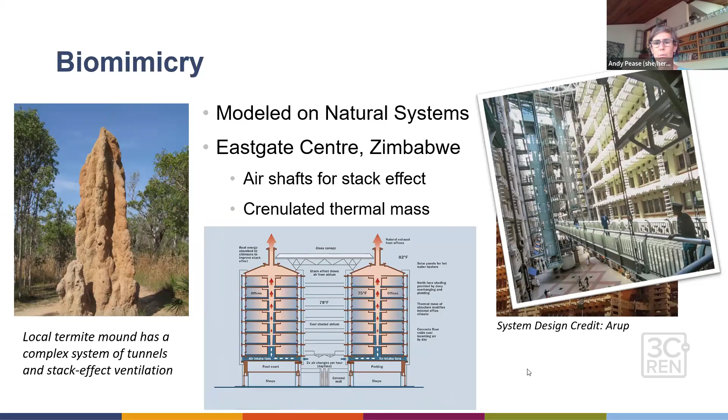And so now to wrap up and discussion. As we said, site responsive design is timeless, and the solar principles, passive solar strategies, are still effective, with some key updates, just making sure we're not relying on old information, that we're connecting to what's current with our building science and technology, and integrating all these strategies to reduce energy, improve health and comfort, and promote resilience.